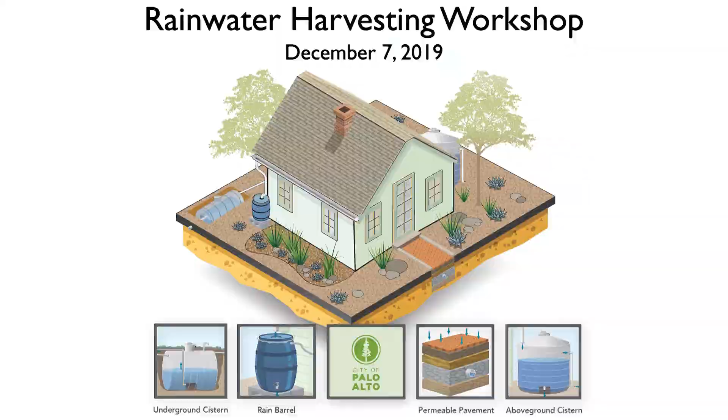And a lot of what Sherri said, I'm going to try not to repeat. And it's not a very long presentation. We just wanted to introduce what we do and talk a little bit about our rebate program. And you can see here the 4 types of rebates that we currently provide. We used to provide a rebate for green roofs. We've decided to take that off the table, and we're working to add a rebate for rain gardens.

Currently, you can ask for a rebate through our program and then also ask for a rebate through the Santa Clara Valley Water District. You have to go through 2 different application processes. We're working with them so that we can just create a more streamlined version. So that'll hopefully be coming within the next 6 months to a year.

So everyone here probably already knows this, but just to make sure, we have 2 separate systems of pipes in the city of Palo Alto, similar to most of the Bay Area, except really the city of San Francisco. About 75% of San Francisco is combined and about 15% is separate. So the city of Palo Alto has one set of pipes that's getting everything from your dishwashers, your kitchen, your bathrooms, your washing machine, and it's all going to one pipe that takes all the flow to the sanitary treatment plant or the water quality treatment plant.

We have some information in the back about that, and we also have tours at the treatment plant if you want to know what actually happens. It all gets treated through a lot of different levels so that before it gets discharged to the bay, it meets a lot of different very strict water quality requirements.

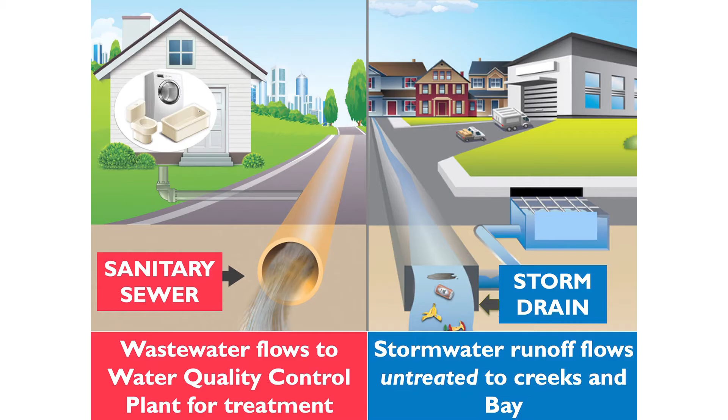Now on the other side, on the right, we have the storm drain system, and that's the stuff that's coming from your house, from buildings, from parking lots, from streets. And as you all know, when it rains, everything gets picked up. I'm sure you've seen a lot of trash go down the curb and gutter. It all goes down into the inlet, and those pipes go straight to our creeks.

Some of them go straight to the bay, but that is why we really care about protecting what's going into our storm drain inlets, because it's not getting filtered, it's not getting treated, unless it's going through some kind of man-made device. It's going straight into our creeks and the bay, and obviously we all love the bay here. That's one of the reasons we all live here. And so we're doing all that we can to protect the water quality of our downstream receiving waters.

And this is an example of a lot of the different pollutants that we run into around here. The top 2 are related to restaurants. And so some restaurants are better at housekeeping practices than others. But generally, when we go to eat at a restaurant, we're just going through the front door. We're not really worried about anything else except how good the food tastes and what kind of customer service we're getting. But our team is kind of worried about the other side, too.

It's like, how are they managing their practices? What are they doing with their waste, their oil, and all that? And how can we keep it from getting onto pavement and into our storm drain system? There's a car wash. Generally, keep an eye out for car washes that are doing this. If you run into this, please report it to us, and we can talk to them about doing something better to manage their stormwater.

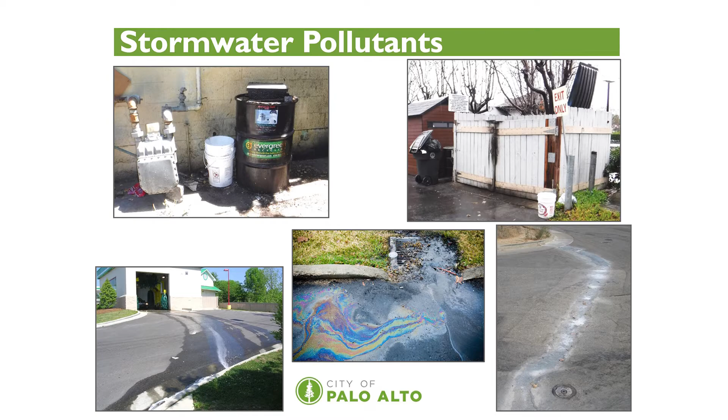So you already heard about this from Sherri, but this is an example of what can happen in our neighborhoods. It's not as bad as commercial sites, construction sites, car washes, but as you heard, it depends on the type of roof that you have. Depends if you have a lawn and what you put on your lawn. Sometimes people aren't cleaning up after their dogs.

Sometimes there's leaky cars. Sometimes people want to do work on their car because they have older cars. For example, we have a colleague who has a lot of old cars that he works on himself. But everything's going down to the street, into that pipe, and into that creek.

So one thing that we're doing at the city is we're working to create something that's called green stormwater infrastructure, which is also a type of measure to treat stormwater. So I'm sorry, it's another term that I'm throwing at you.

And let me see. I'm actually not sure where this is from. Isabel, do you know where this is from? Okay, sorry about that.

So green stormwater infrastructure is designed in such a way to capture a particular size storm. Generally, it is a 2-year storm. It's also designed with gravel and soil on top of that. So gravel maybe around 18 inches at least. Then there's soil that is mostly sand and compost, and then there's specific plants that are picked out.

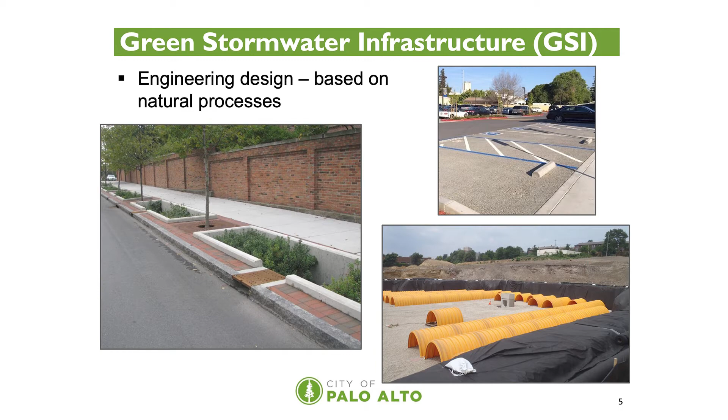And so if a development is at least 10,000 square feet of impervious area, or if it's a parking lot, a gas station, a restaurant, an auto care facility, then it would only be 5,000 square feet and above. They trigger stormwater treatment requirements. For example, that's why Mitchell Park has stormwater treatment, because it triggered the requirements. If you go to other places, there's triggers for stormwater treatment.

So you'll see a lot of the new businesses, if they're over 10,000 square feet, a lot of the mixed-use buildings, they're going to have some kind of stormwater treatment on site. And they have an agreement with the city, and we inspect them every year. We go and check and make sure these measures are being maintained. And if they're not, then we work with them to get them in compliance.

So if it's a single-family residential development, in Mayfield, for example, each house may have stormwater treatment. And that maintenance agreement, just so you know, is attached to the deed. It gets recorded with Santa Clara County. So when there's a change in ownership, the new owner should know about that. But sometimes that doesn't happen, and we do run into times when someone didn't know they had a bioretention area in their front yard, and they paved over it and put in a driveway, and then we have to figure out how to deal with that situation.

So if you're interested in doing something like this in your neighborhood, please talk to us. We love that idea, but we're definitely concerned about maintenance, because let's say that you're really interested, but then you move in 5 years, and the next owner has this in front of their house, and they might not be interested in maintaining it. It could cause a problem for the whole neighborhood. So we're leaning toward not really putting these in neighborhoods, because neighborhoods don't have as many pollutants as commercial areas. But there's still a lot being determined in the city about what kind of facilities and where we want to put them.

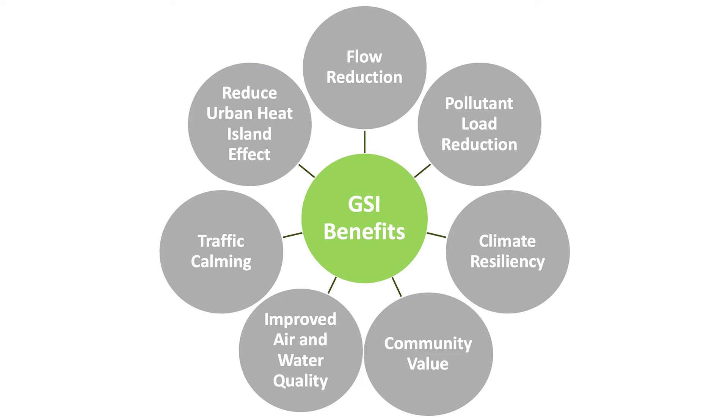And we've already talked about Mitchell Park. We do have a green roof here, and we also have a bioretention area. And so just a note about one reason we took green roofs off the table for the stormwater rebate program is because they're really hard to maintain. And that's one thing that we learned. Not only is it a lot more complicated to build, but we've had a lot of trouble maintaining our green roof here. We've had a lot of different bugs come in.

The irrigation sometimes gets into problems, and it's hard to fix because you have to go to the roof. If you get clogs, you need more pumping, you need more energy to get irrigation up there, and you definitely have to irrigate that all year to keep it living. So we're not against green roofs, but it might not be the best idea if you're a resident because it's just a lot of work, unless you're really into it and you want to do it.

And this is that bioretention area that Sherri mentioned. So if you look right here, this is pervious pavement. Usually pervious pavement is not recommended to drive on very much because it can get clogged a lot. So that's why we've only put it in the parking spaces. When you go out there, you'll see that where most of the driving is going to be on asphalt, the parking is in the pervious area.

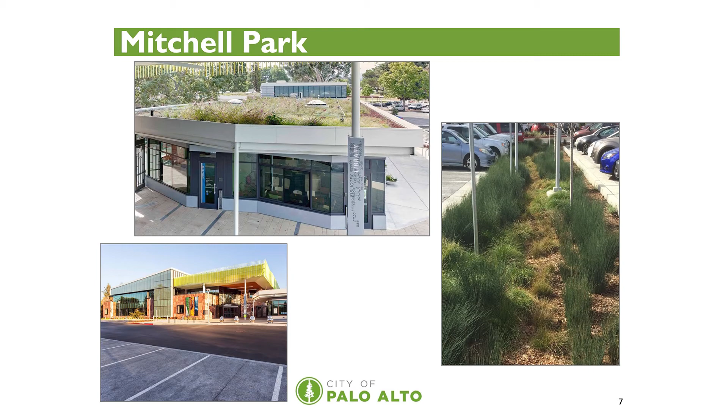But we've also run into needing to vacuum it because there's a lot of traffic in and out. So if, let's say you put pervious pavement in your driveway, you're probably not going to have that much of an issue, but you should still try to maybe pressure wash it every few years. You'll know if it's ponding, you'll know that it needs maintenance. In an area like a library, especially this library is so popular, we vacuum it more than once a month. And actually this morning I noticed some ponding, so we'll have to check it out.

So what we want to do is really get away from getting all the stormwater here and getting it to areas like pervious pavement or bioretention areas. This is what's being called gray infrastructure. And stuff like this, GSI, is called green infrastructure. So we're really wanting to start to go from gray to green.

Now, this doesn't mean we're going to get rid of all our pipes because we don't have enough room to put these in everywhere. We certainly don't have enough funding for maintenance to put these into every corner. And if it rains too much, this is going to fill up. And so we still need pipes. So it's going to be a combination of things. But at least we're moving. We're moving toward changing it up a little bit.

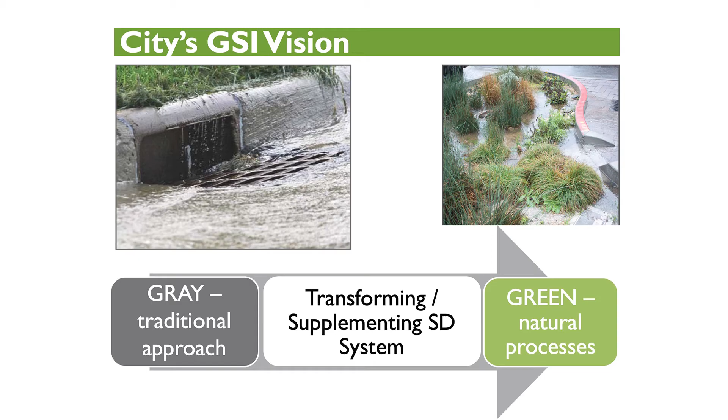And so if you all want to see what we've done, Isabel and I put our hearts into this for a long time, for about a year and a half. And this outlines what we, as a city, would like to do. It's a very first phase. It looks at properties that the city owns.

It doesn't look at streets yet because there's still a lot of work to really prioritize where we want to work, but that's what I meant by when we're working with the Department of Transportation to do some prioritization of maybe which streets work best. But if this is an ideal street, it's not meant to be a street in Palo Alto, but you see, assume traffic is going that way.

You have curb openings right here in these bioretention areas. You have a bike lane. This is supposed to be pervious pavement. You have a stormwater planter capturing runoff from the building. And you can't see it so well here, but if you look here, this is where the tree is planted. We can put in some, almost looks like milk crates.

They're not drawn into here, but if you picture like a huge milk crate that allows the roots to go through the openings and go under the sidewalk, and also allows the water to infiltrate. And we can put special soil there, some soil right around the roots for the tree to grow, and then surround it with stormwater treatment soil. We can also help the tree grow, reduce heat island effect, capture stormwater.

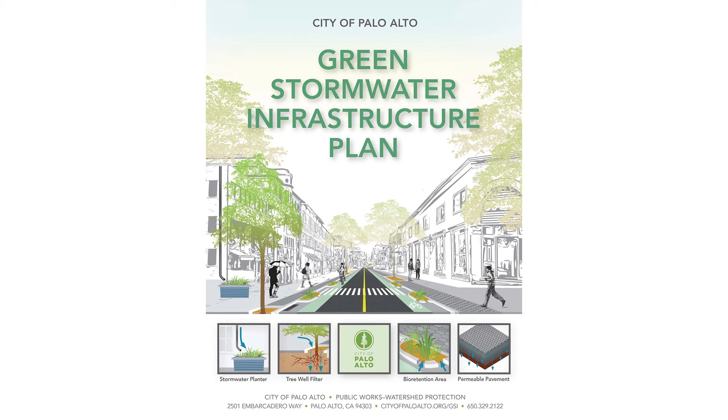So these are some of the things we're talking about. So the plan really outlines what these things are and what we are moving toward as a city. And if you can't put green stormwater infrastructure somewhere, what we're also talking about in our plan is, if you're thinking about retrofitting something at your commercial building or at your residential building, one of the great things you can do is think about how to get disconnected from the storm drain system. So you've already heard a lot about that with the rain barrels.

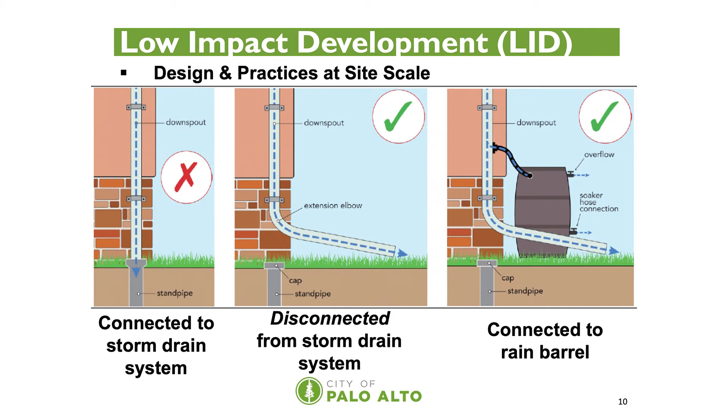So I'm going to move on. And you've already seen a lot of this. These are just examples that we also put in our plan. This is capturing roof runoff. This is as well. And this is actually what would be called a bioretention area, and the reason that it's not a rain garden, more like this one, is because this is engineered with certain plants. It has certain soil. This is connected to the storm drain system, and actually this should be more raised so that this area can receive more runoff, and then it overflows to here.

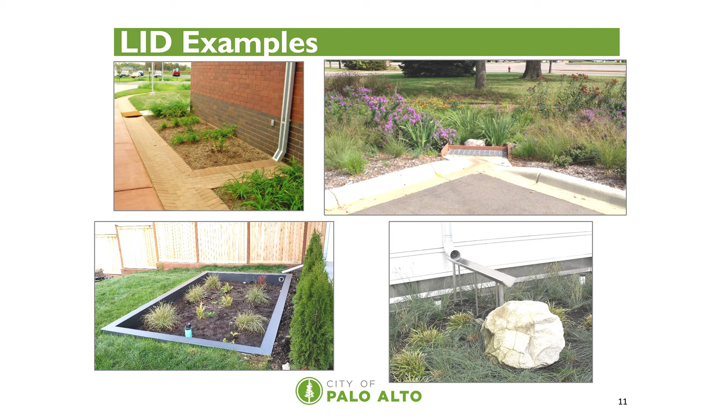So I'm actually going to let Isabel talk to you about our stormwater rebate program because, as she says, she's your primary contact. Go ahead, Isabel. Hey everyone. So Sherri did a great job talking about all the different types of rainwater harvesting measures that we have that you can implement at your own household. So now that you're all excited to put these measures in place, we just wanted to talk a little bit more about what the Palo Alto specific process is.

And understand that Valley Water also has rebates available throughout the county. But just for the purposes of the Palo Alto residents, we just wanted to touch on some of the items to look out for. So right now we have 3 different rainwater harvesting measures available. So rain barrels, permeable pavement, and cisterns. And Pam mentioned that we're also going to be coming online with rain gardens as well within the next maybe about 6 months to a year.

And right now Valley Water does offer a rebate for rain gardens. So if you'd like to put one into your household before the city has a program in place, then you can definitely reach out to Valley Water and get that rebate from them. And so I just wanted to highlight, right now, like I said, we offer 3 different amounts. So for rain barrels, it's $50 per rain barrel. For permeable pavement, it's $1.50 per square foot. And then for cisterns, it's 15 cents per gallon.

For all residential rebates, we have a max of $1,000. So just another item to highlight. And so the website at the very bottom here, cityofpaloalto.org/stormwater. If you just go to that link, you'll see all of our information about the rebates, and it'll have specific information about the different types, our application, which can be a paper application as well as online.

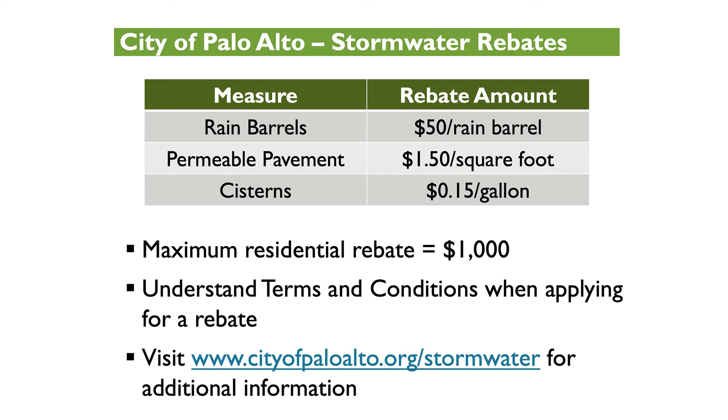And then if you haven't already, we have a really great visual. It's two-sided, one page. I think Pam's got it in her hand. So the one side has the stormwater rebates that we offer right now with our contact information, and then the other side actually has the cover for our GSI plan, our Green Stormwater Infrastructure Plan that Pam just mentioned. So it's got the contact information on there, and then on the back table to the right, I also have my personal business card. So the sheet that Pam has our general contact information for the office.

So if you do have any rebate questions, you can call the general line. It'll make its way back to me anyways, so you can either grab my personal business card or contact our general office as well. Yeah, anytime you guys have rebate questions, I'll be the one most likely answering your questions. So just wanted to introduce myself. But oh, yeah, and then Joanna has copies right now, so if you want one right now, you can raise your hand and Joanna will pass it out. We've got a couple in the front.